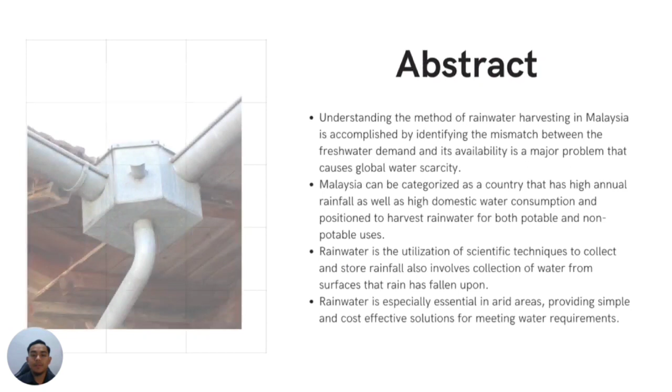So now for the abstract. First, we must understand that the method of rainwater harvesting in Malaysia is accomplished by identifying the mismatch between freshwater demand and its availability, which is a major problem that causes global water scarcity.

Second, Malaysia can be categorized as a country that has high annual rainfall as well as high domestic water consumption, positioned to harvest rainwater for both potable and non-potable uses.

Third, rainwater harvesting is the utilization of scientific technique to collect and store rainfall, also involving collection of water from surfaces that rain has fallen upon.

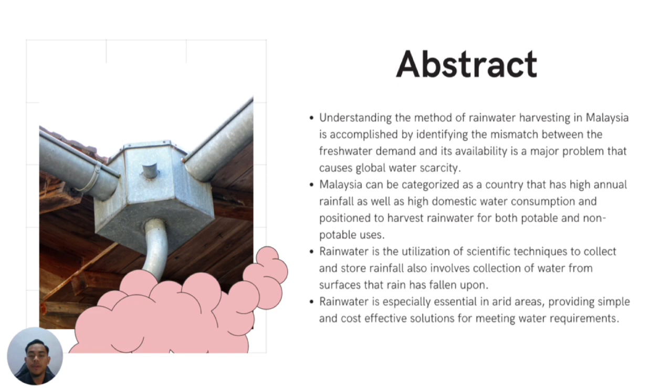Lastly, rainwater harvesting is especially essential in arid areas, providing a simple and cost-effective solution for meeting water requirements.

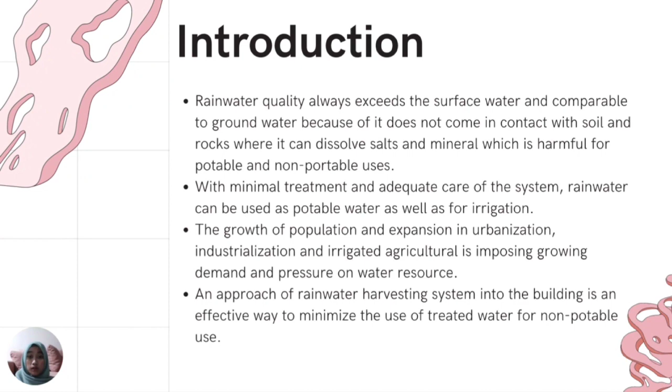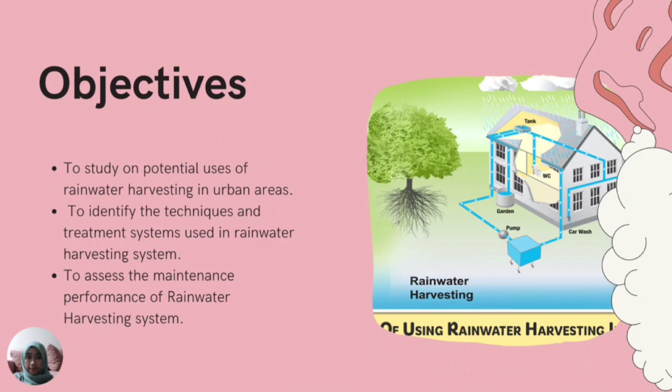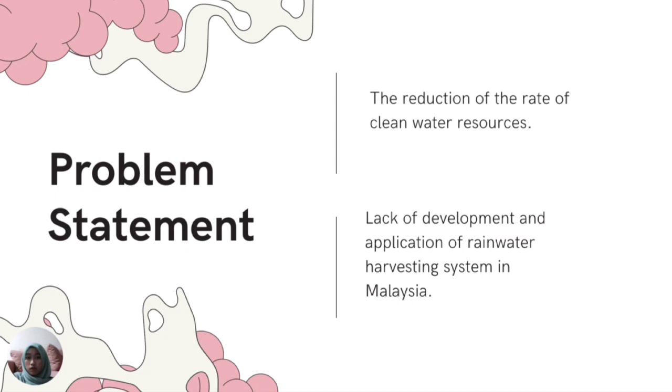Next we talk about the problem statement. First, the reduction of the rate of clean water resources. Second is the lack of development and application of rainwater harvesting systems in Malaysia.

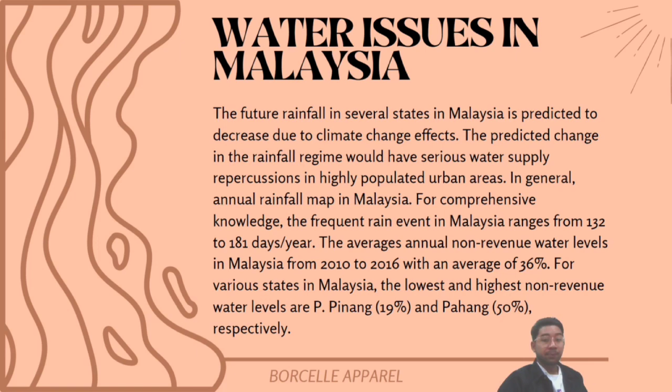The lowest and highest non-revenue water levels are Pulau Pinang at 19% and Pahang at 50% respectively.

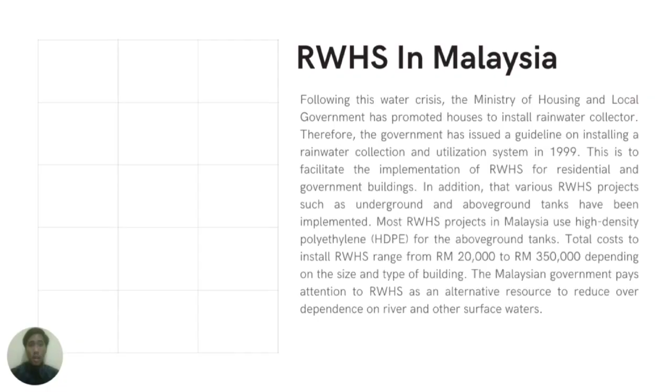Rainwater harvesting system in Malaysia. Following this water crisis, the Ministry of Housing and Local Government has promoted houses to install rainwater collectors. Therefore, the government issued a guideline on installing a rainwater collection and utilization system in 1999. This is to facilitate the implementation of rainwater harvesting systems for residential and government buildings. In addition, various rainwater harvesting system projects such as underground and above-ground tanks have been implemented.

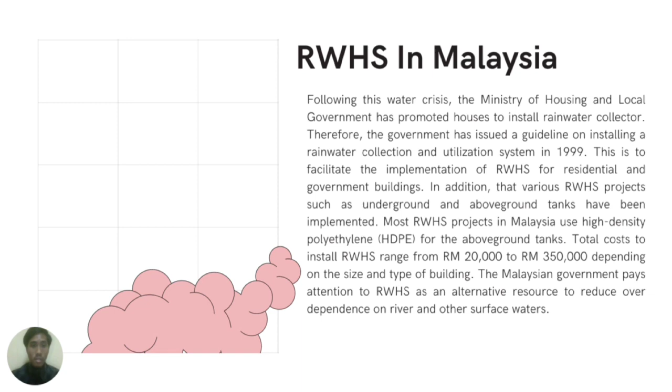Most rainwater harvesting system projects in Malaysia use polyethylene for the above-ground tank. Total cost to install a rainwater harvesting system ranges from RM20,000 to RM350,000, depending on the size and type of building. The Malaysian government pays attention to rainwater harvesting systems as an alternative resource to reduce over dependence on rivers and other surface waters.

Next is the benefit of rainwater harvesting system. In general, the benefits can be divided into two categories, namely environmental and economic. For environmental benefit, it can be used as an alternative water supply to supplement pipe water. When used at large scale, rainwater harvesting systems can help reduce flash floods in urban areas, minimize soil erosion, and prevent pollutants from entering water bodies.

The economic benefit of rainwater harvesting systems has been examined by several researchers. Since rainwater harvesting systems are very useful for non-potable water use, they have the potential to reduce bills. Financial viability analysis of the rainwater harvesting system was assessed for single and multi-family buildings.

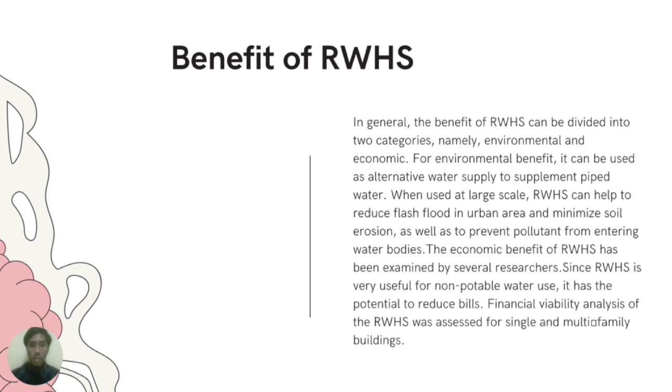Next is about rainwater harvesting system types. In Malaysia, several types of rainwater harvesting systems have been implemented, namely backyard system, frontage system, and underground system. Backyard and frontage systems are also established as collection systems only, because they have no distribution system.

Backyard system is the most popular because it is cheap and easy to install compared to other systems that require plumbing. For the frontage system, it adopts the same installation concept as the backyard system. A modification is usually done by replacing the polyethylene tank with a reinforced concrete tank to facilitate maintenance work.

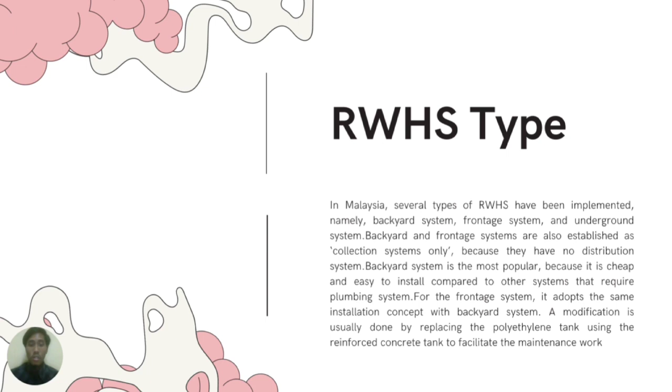Next, for the recommendation, there are two recommendations that we have highlighted. First, the Malaysian government should start to introduce subsidies for premises owners who install rainwater harvesting systems in Malaysia on their own initiative. This can help boost the implementation of rainwater harvesting systems in Malaysia.

The second recommendation is restricting the usage of pipe water, especially during critical times. This is another way the Malaysian government could promote rainwater harvesting systems in Malaysia. For example, in Australia, this strategy has been put into place by limiting the use of water for non-essential uses like watering the lawn or washing the automobile at individual locations, especially during the drought season.

By initially educating the public through official and informal channels, particularly among school children, Malaysia might imitate such a method. So regulations and rules have to be put in place to support this.

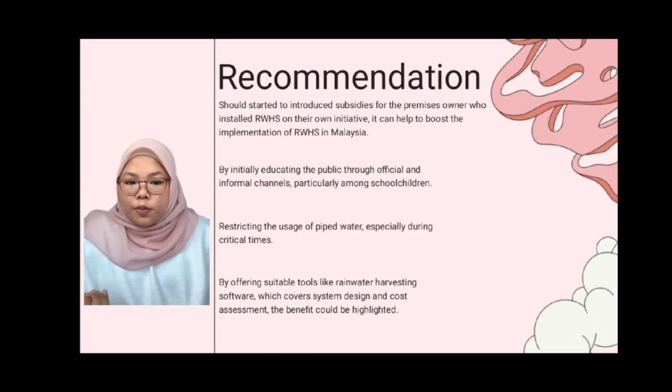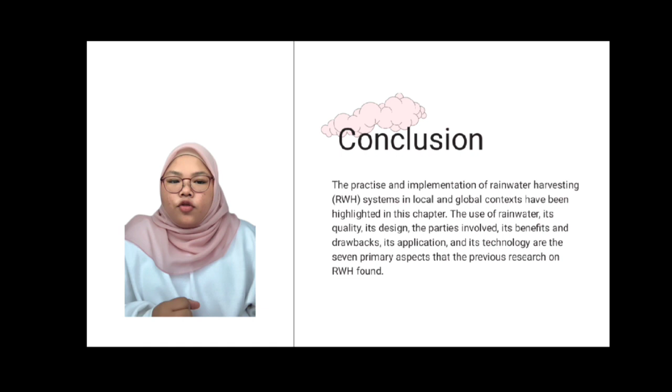Next, for the conclusion, the practice and implementation of harvesting systems in local and global contexts has been highlighted in this chapter. There are 7 primary aspects that previous research on rainwater harvesting systems has found, which are the use of the rainwater, its quality, its design, the parties involved, the benefits and drawbacks, and also its application and the technology.